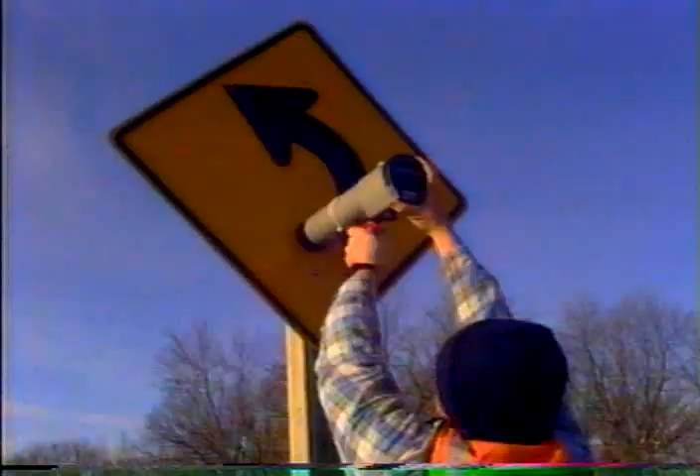I won't ask you to pronounce that again, but what is that? That is a device that will check the reflectivity of the sign and give us a meter reading as to how the quality of the sign might be. So after you've determined there's a problem, what's the procedure then? Any of the problems that we find on these inspections would be put on a complaint form.

So there must be quite a pile of those things. How do you handle that? Well, the emergencies we take care of as soon as possible. The other problems are put on a work order master list from the complaint forms, and we have a large list. And then I assign that to the traffic control foreman, who then prioritizes his work and schedules his work on a daily basis to go to his crew.

So by keeping good records of all the problems reported in inspections or employee observations or citizens' reports, then you prioritize the needed maintenance, schedule and assign the work, and then record what the job involved and when it was completed. So that must give you a pretty detailed history of about every sign in the county. Yes, it does, and recently we converted all this information to a computer database so we can access it much quicker and easier.

Well, Ken, I'll let you get back to work. Thank you very much for the information. Appreciate you coming in. Thank you very much. Thank you.

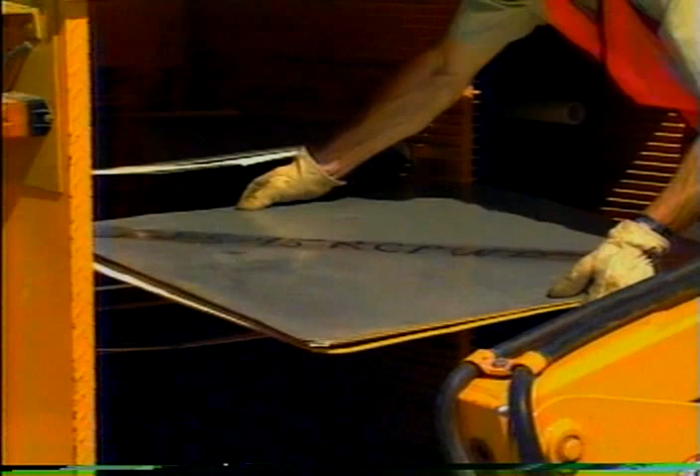The next step is out here. Before going out on the road, the repair trucks need to be equipped with the right signs and, of course, the right tools. All the key signs are kept on the truck, and they require special care. Whether stored vertically or horizontally, the sign face must be protected by placing some kind of packaging or protective wrapping between each and securing them so they don't rub against each other, keeping the packing material dry.

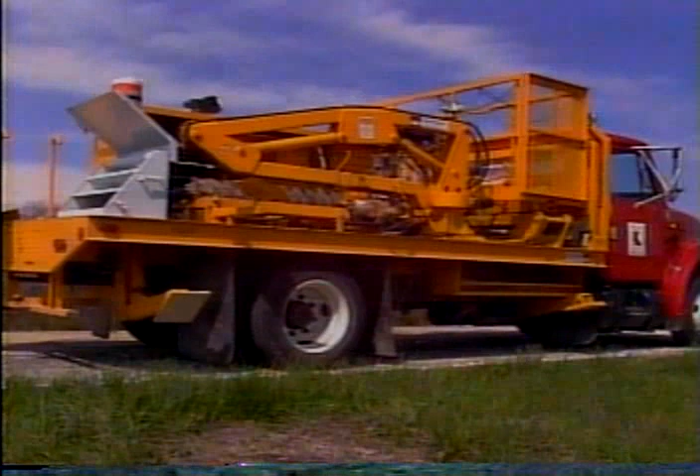A comprehensive list of common and necessary equipment and tools can be found in the pamphlet Maintenance of Small Traffic Signs. However, here are some not-so-common items found on Riley County trucks. Because of the flexible nature of Carsonite posts, it's recommended you attach only one blank. On occasion, Riley County wanted the sign to be visible from both directions, so they made this modification. A face was applied to both sides of one blank, and the Carsonite post was painted to match.

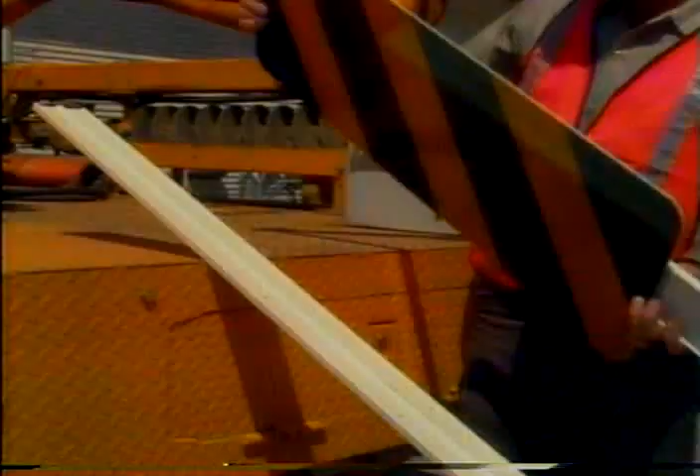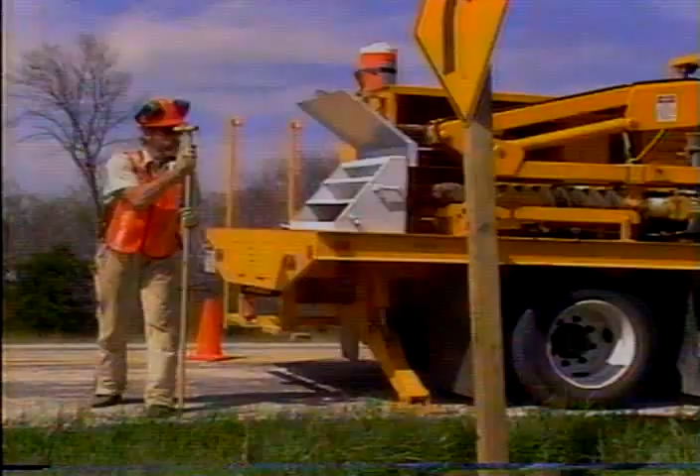The handle of this wrench was bent to facilitate the installation of tough nuts up next to the post. Tough nuts and Loctite are used with carriage bolts because they discourage vandalism. A looped cable was made so it tightens around a wood post as it's pulled. This device is exactly 5 feet high and used to check the height of the bottom of a sign from the edge of the traveled way during installation.

All Riley County sign trucks are equipped with a ball bank indicator to frequently check curves and turns, and a distance measuring instrument, which determines the longitudinal placement of signs. Every truck should have these items for the protection of the crew: hard hat, gloves, ear protection, back brace, orange safety vests, cones, warning barricades, and flashing beacon. They also carry the Manual on Uniform Traffic Control Devices and the Kansas Handbook for Low-Volume Rural Roads.

We're going to show you 4 typical but very important operations: minor maintenance, sign and post installation, using a ball bank indicator to determine the need for either a curve or turn sign, and if a speed advisory plate is required, and finally, object markers and delineators. For each of these operations, we'll stress conformance to the standards and guidelines in the Manual on Uniform Traffic Control Devices, the Handbook of Traffic Control Practices for Low-Volume Rural Roads, and the Maintenance of Small Traffic Signs.

Minor maintenance is our first example. Chuck noticed this sign en route to another location and has decided to repair it now. Even though Chuck will be stopped for only a few minutes, he follows the appropriate procedure for traffic control. He parks in the direction of traffic and as far off the road as possible with the truck's warning beacon flashing. He places an advance warning sign where it can be seen by approaching drivers and sets out cones to channel the traffic around the work area.

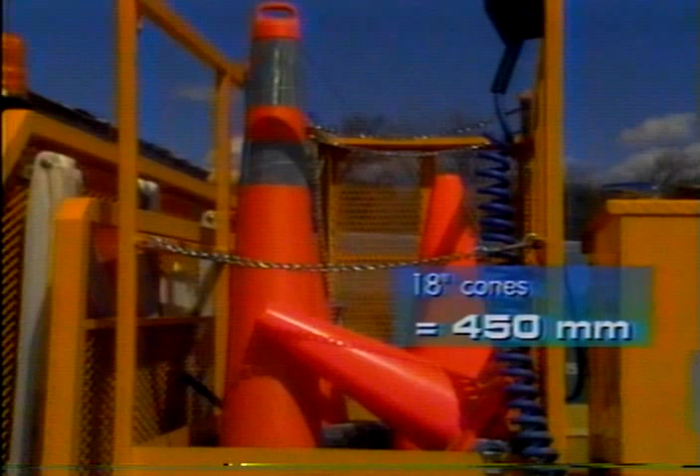On low-volume roads, that is less than 400 vehicles a day, with speed limits of 55 miles an hour or less, 18-inch cones are used. On roads with speed limits above 55 miles an hour, or when working at night, 28-inch or larger cones with reflective strips are used. Since speed limits, traffic count, sight distance, and location conditions influence the kind of safety work zone needed, work crews need to be familiar with the guidelines in Part 6 of the Manual on Uniform Traffic Control Devices. The rear bumper is a heavy-duty bumper with a non-skid surface to allow Chuck to safely stand on it.

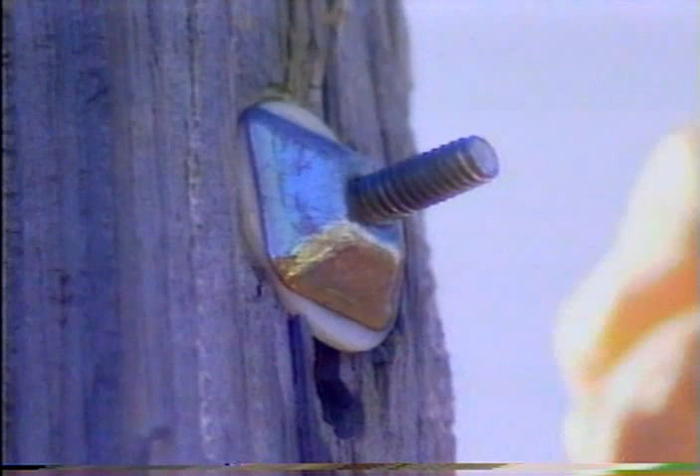After tightening the tough nut on the carriage bolt, Chuck applies Loctite, one brand of fluid that keeps the bolt from working off. While the manufacturer recommends applying the fluid to both the bolt and nut, be aware that it will make removing the tough nut almost impossible. The job isn't finished until the work has been recorded. This is very important, not only to keep the inventory and work schedules current, but also to help protect the agency in any tort liability cases. Replacing a sign and post is our second field operation.

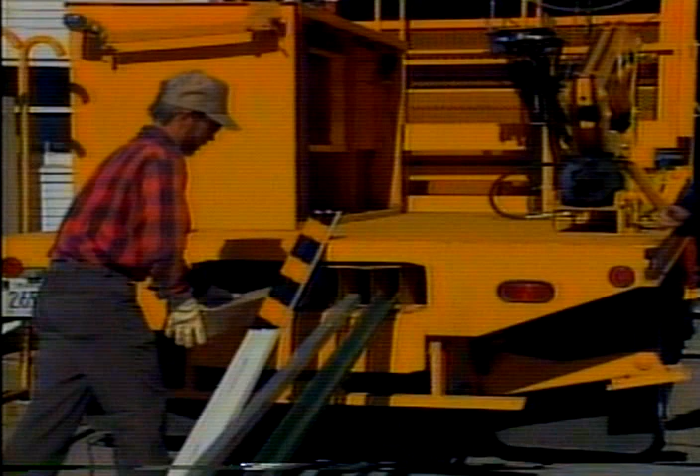There are several types and sizes of posts. Which one is right for the job? Two things must be considered. First, safety. For successful, safe performance, a post must bend and lay down or fracture when hit without causing excessive damage to vehicles. Base-bending metal signposts have been used for many years to provide effective economical support for signs.

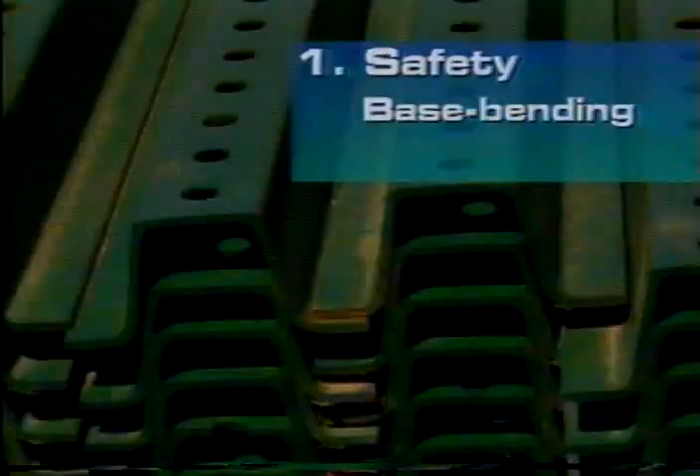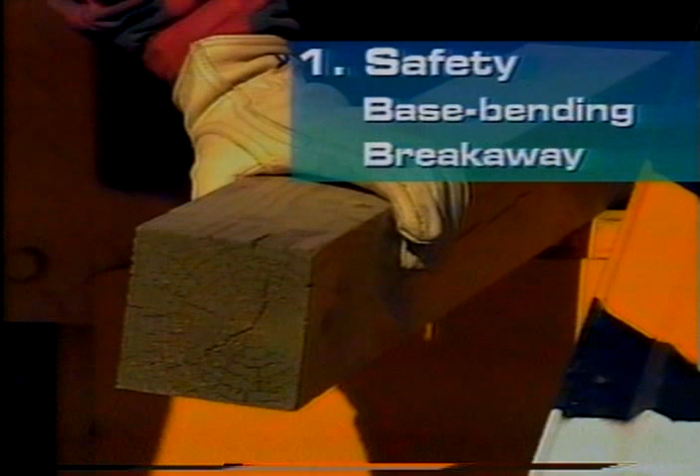A base-bending metal post has no built-in breakaway or weakened design. Steel U-posts, standard steel and aluminum pipe posts, square steel tube posts, and X-posts are all base-bending metal signposts. Wooden posts up to 4x4, on the other hand, are considered breakaway posts. Larger wooden posts must be drilled to assure they'll break away when hit. Secondly, whether metal or wooden, all posts must be sized properly based on the type of sign they will support.

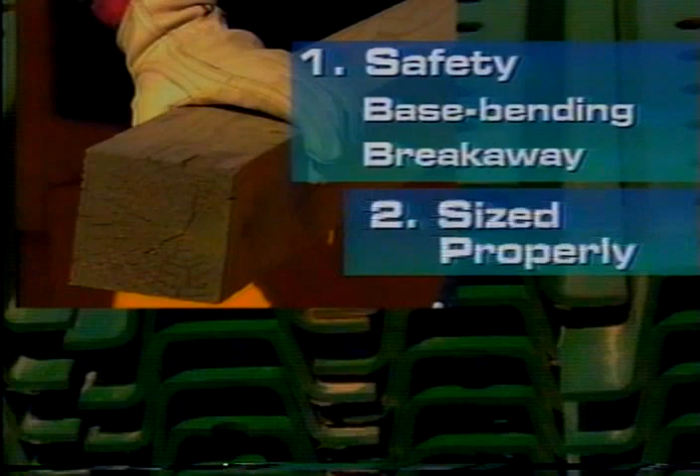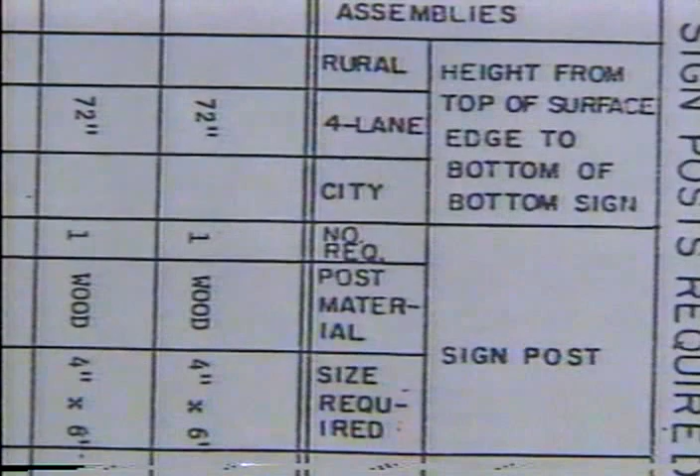Here's an example of a table provided by the Kansas Department of Transportation. The appropriate post for each size of sign and the minimum length of post in the ground can be determined. Suppliers also provide similar tables. The guidelines in the Manual on Uniform Traffic Control Devices are based on a typical situation. It states that normally, signs should not be closer than 6 feet from the edge of the shoulder, or if no shoulder, 12 feet from the edge of the traveled way.

In many local roads and streets, particularly in rural areas, these distances would be unrealistic or impractical. And on rural low-volume roads with no shoulders and narrow right-of-way, 6 to 12 feet would put the signs in weeds and bushes. So the following guidelines should be followed. All signs should be at least 2 feet outside the shoulder, or if none, 2 feet outside the traveled way to avoid being struck by large vehicles.

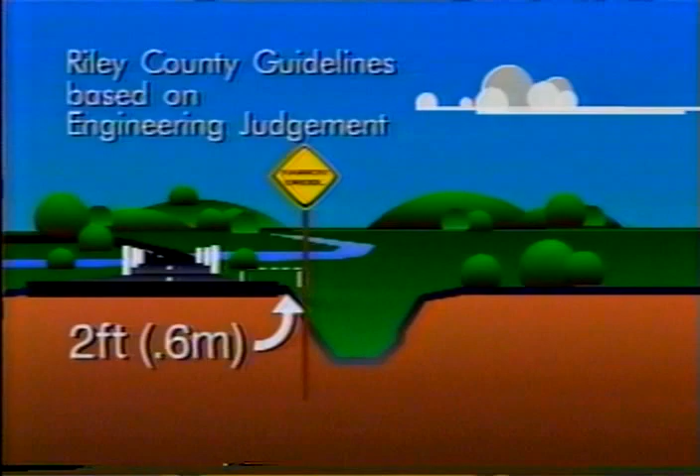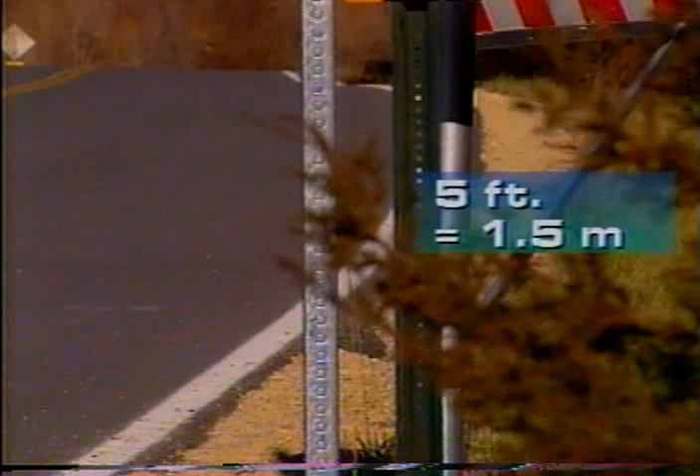Signs erected at the side of the road in rural districts are to be mounted at a height of at least 5 feet, measured from the bottom of the sign to the near edge of the traveled way. In business, commercial, or residential districts, this height is 7 feet. The height to the bottom of a secondary sign may be 1 foot less than the normal height.

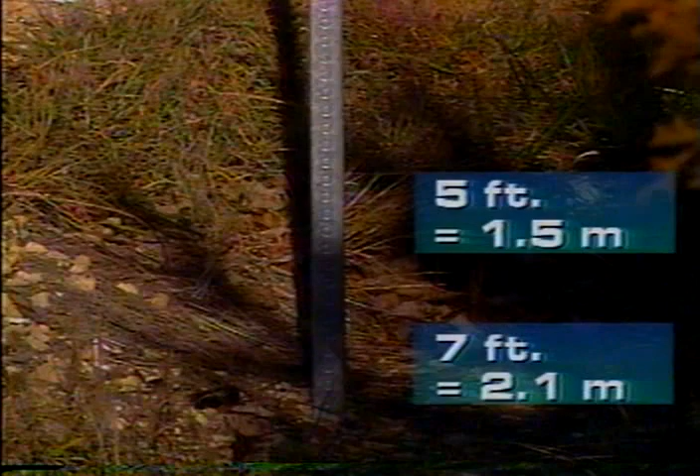A routine inspection found this warning sign leaning over. The ditch was partially caved in, so the new post will need to be driven in a different place. Before any new hole is dug, even if only a few inches from the previous one, you must check with all utility companies. Severing a buried cable could be dangerous and costly. So the sign supervisor called DigSafe, a utilities clearinghouse here in Kansas, before assigning the job to Doug.

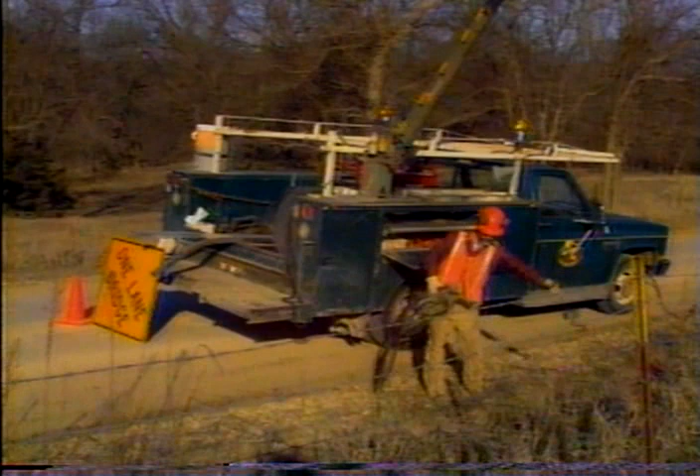After detaching the sign, Doug removes the old post with a hydraulic post puller. The post driver is attached to the crane and elevated so the post can be inserted in the driver. It's good procedure to clean the quick couplers of the hydraulic hoses before connecting.

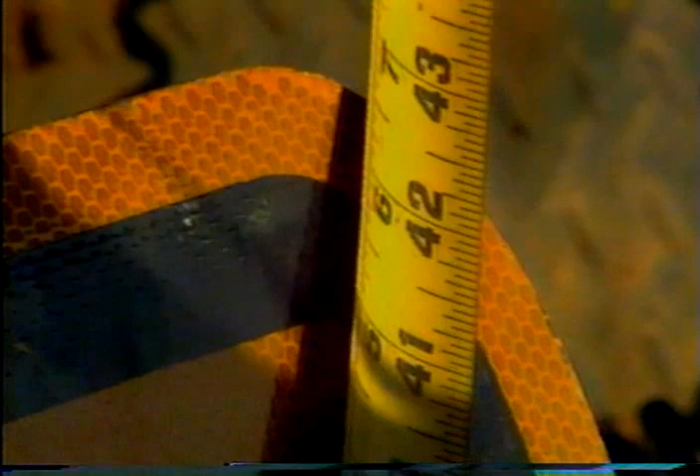Before driving the new post, Doug measures first the sign, then the post, marking where the bottom of the sign will be. This mark is his guide for driving the post to the proper depth. The new hole will be about a foot from the old one and is within the proper guidelines for distance from the edge of the traveled way.

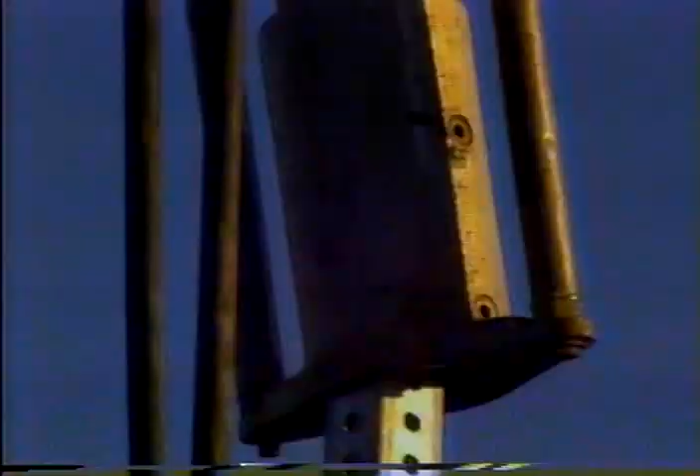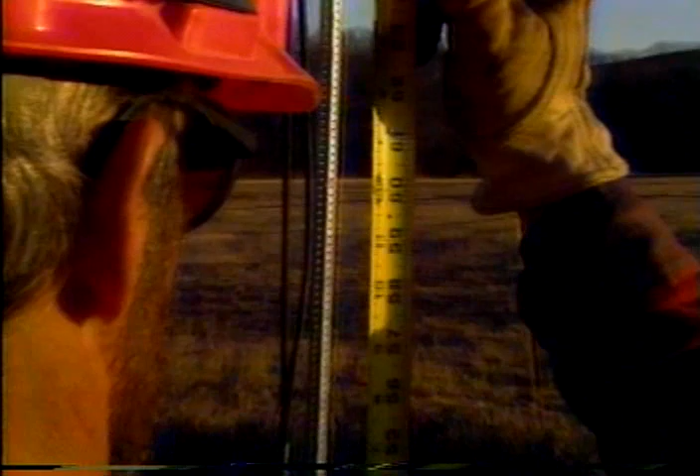While driving the post, Doug keeps track of the depth and uses a level to make sure the post is straight. When the post is at the right depth, the height of the mark is checked from the edge of the road. It is at the proper level, 5 feet. The sign is then bolted to the post using carriage bolts, tough nuts, and Loctite. And again, the work is not finished until it's recorded.

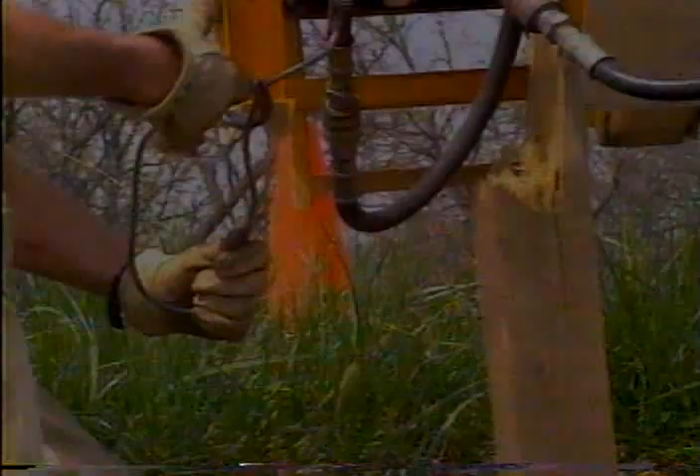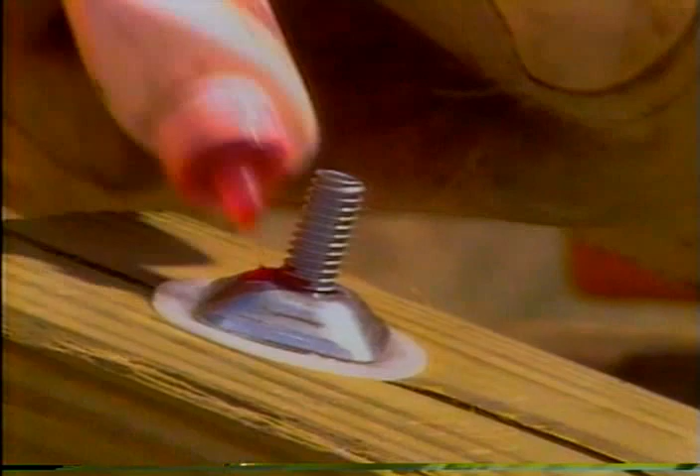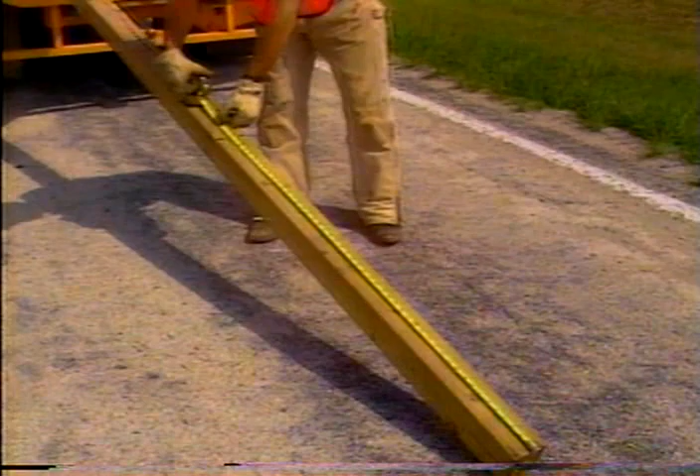Here's the procedure for replacing a wooden post. The modified cable is used to pull the broken wooden stub. The sign is bolted to the post. A mark is placed 5 feet from the bottom of the sign. The remaining length of the post from that mark to the bottom of the post is measured. This is how deep the hole must be dug if the shoulder is level with the road.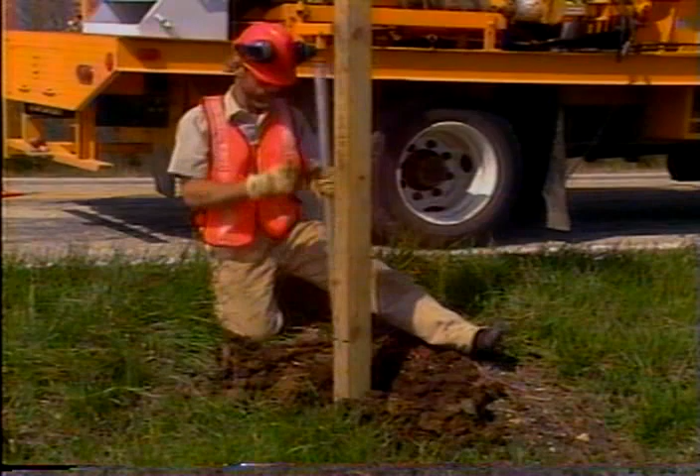If the shoulder slopes downward, a longer post may be needed to make sure the minimum length is in the ground. Before filling the hole, the height of the bottom of the sign from the edge of the traveled way is rechecked. It's very important that the soil be tamped for stability as the hole is filled, and that the vertical level is checked.

When a sign needs to be placed where there is solid rock, a jackhammer can be used. Or when there is no solid base, such as this area, concrete may be used.

Curves in the road. When do they need a warning? And is it a turn or a curve? And what about a safe speed advisory? How you determine the answers to these questions is our next subject.

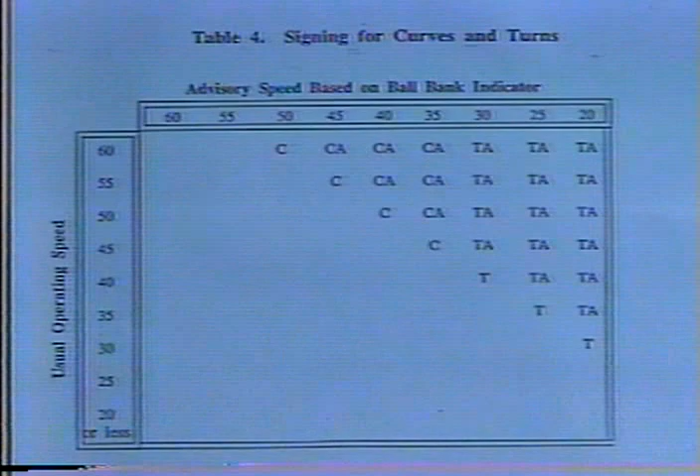The Kansas Handbook of Traffic Control Practices for Low-Volume Rural Roads recommends the use of an advisory speed plate when the advisory safe speed of the curve is more than 10 miles an hour lower than the approach speed limit or the prevailing approach speed. This handbook also has a table to help determine when a curve or turn sign is needed and if an advisory speed plate is necessary.

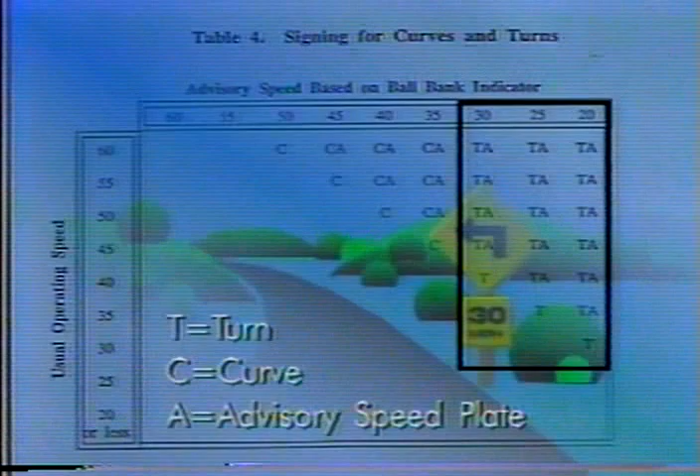When the advisory safe speed of a curve is 30 miles an hour or less, a turn sign is used. When the advisory safe speed of a curve is greater than 30 miles an hour, then a curve sign is used. The key is knowing what the advisory safe speed is for each curve. The accepted practice is to use a ball bank indicator to determine what that safe speed is. When installed in a perfectly level vehicle, the indicator should read 0.

Maintaining a smooth and steady speed, several runs are made through the curve. The first run should be made at a speed somewhat below the anticipated maximum safe speed, the subsequent runs at 5-mile-an-hour increments. If a ball bank reading of 14 degrees or greater occurs at 20 miles an hour or less, the advisory safe speed is below 20 miles an hour, which means a turn sign is needed.

If a ball bank reading of 12 degrees occurs at the trial speed run of 20 miles an hour, 25 miles an hour, or 30 miles an hour, then the speed at which it occurs is the advisory safe speed and a turn sign is needed. A ball bank reading of 10 degrees at trial run speeds of 35 miles an hour or greater indicates that the safe advisory speed of the curve is 35 miles an hour or greater, so a curve sign is needed.

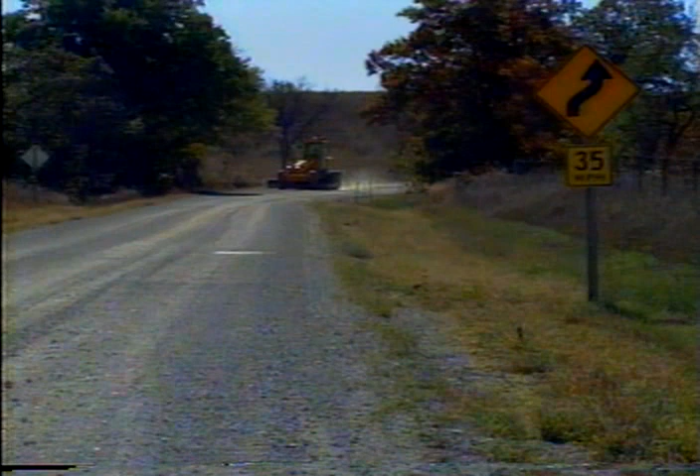The advisory safe speed is then compared to the established or prevailing speed limit. In this case, the speed limit is 55 miles an hour, which is more than 10 miles above the advisory safe speed of 35 miles an hour, so an advisory speed plate is required.

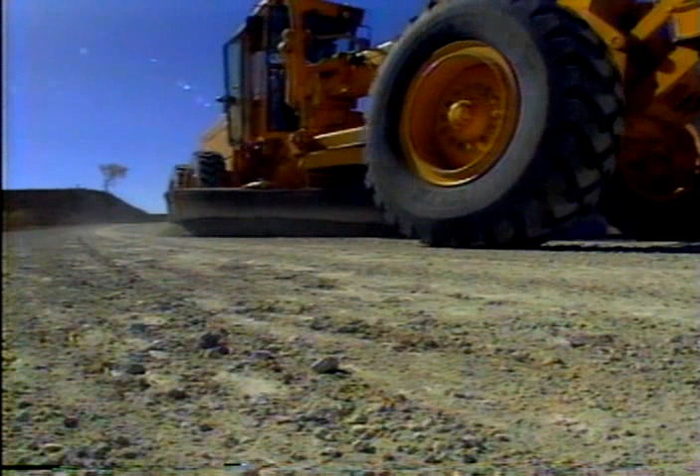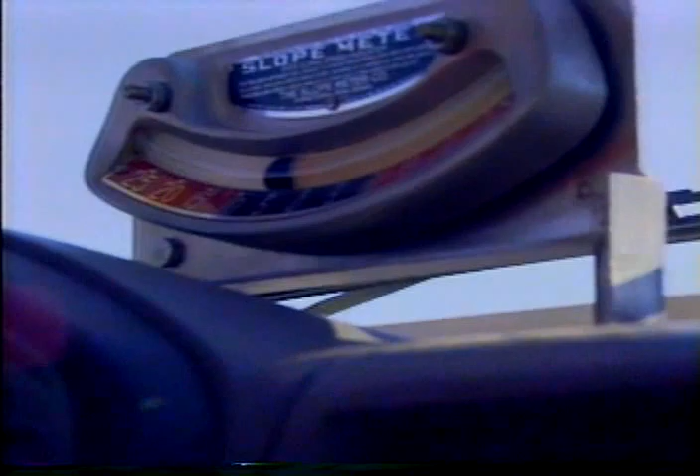Curves, especially on unpaved roads, frequently have their cross sections changed, and that can change the ball bank reading. Every time your grader operator grades a curve, the ball bank reading could change. Because many factors affect the surface of the road, ball banking curves is an ongoing process. All Riley County sign trucks have ball bank indicators mounted permanently on the dashboard, so they can frequently ball bank the curves.

Our last field operation involves object markers and delineators. Object markers are used to mark obstructions in or adjacent to the roadway. There are three main types. Type 1, Type 2, Type 3. Type 1 and Type 3 are used for obstructions within the roadway. Type 2 and Type 3 are used to mark obstructions adjacent to the roadway.

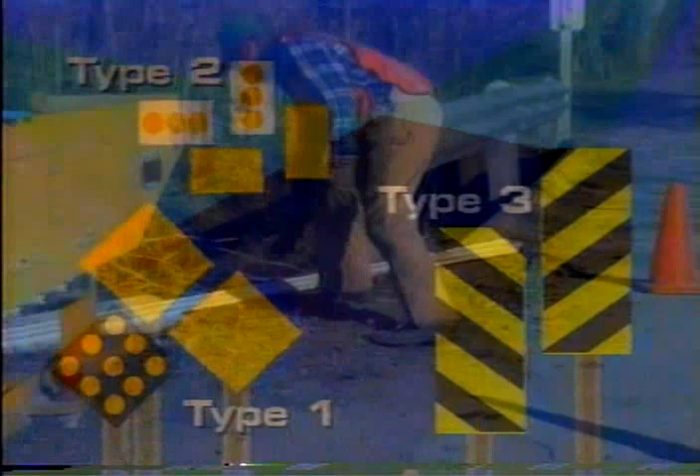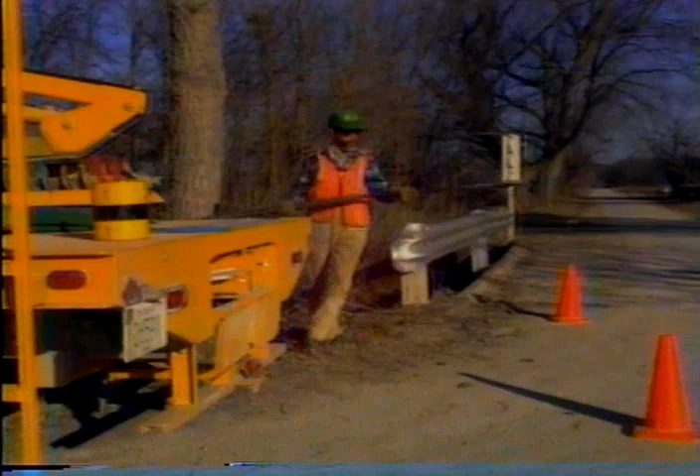Here, a Type 3 object marker near a bridge abutment needs replacing. For this type of post, a special pilot driver is used to make the hole. A flexible carsonite post is used because it can withstand being hit occasionally by farm equipment. The new post is marked where the bottom of the sign will be. It also requires a special post driver.

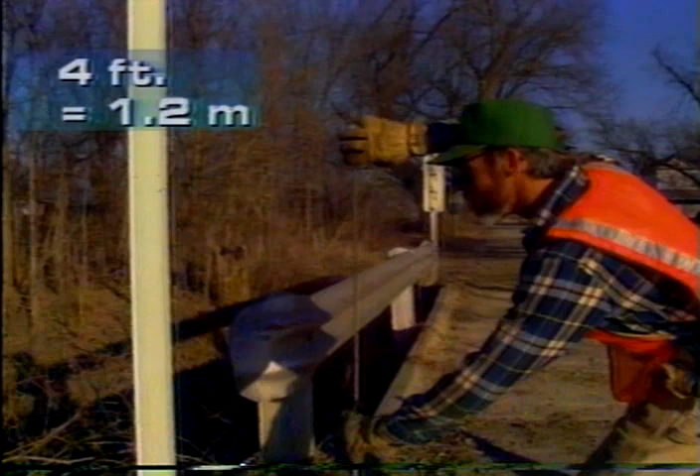As you can see, this is a very flexible type of post. Use caution when removing the driver. The post is driven to the appropriate depth for the bottom of the sign to be 4 feet above the surface of the road. The Type 3 object marker is attached with rivets, and spacers are placed between the sign and post. And of course, the work is always recorded.

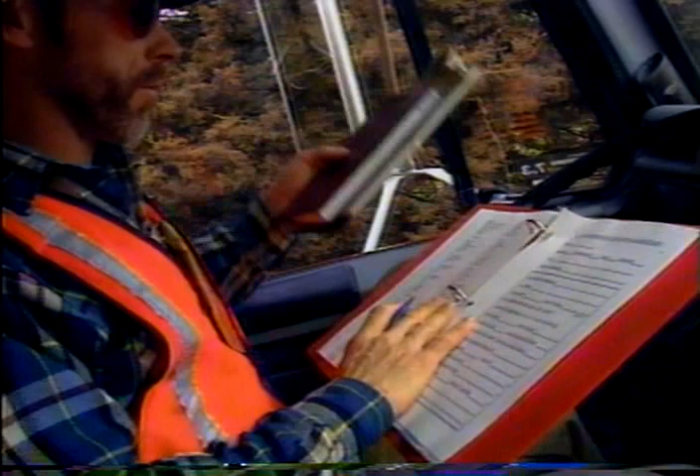Delineators indicate the horizontal road alignment. On gravel roads, they are the only indicators.

We've shown you a system of tracking and recording problems, the signs and equipment necessary for proper maintenance. We've demonstrated some typical maintenance operations following the guidelines in the Manual on Uniform Traffic Control Devices. And we've also used the Kansas Handbook on Traffic Control Practices for Low-Volume Roads. Most states have similar manuals to this. But what makes it really happen? We asked the Riley County Director of Public Works.

If you operate a proper signing program, where you're into signage maintenance, where you're concerned about the proper sign, the proper placement of the sign, and then once it's been placed, the proper maintenance of that sign, that is an expensive undertaking. However, if you choose not to do those things, the alternative is even more expensive. Then we also invest fairly heavily in our personnel; everybody from the people that are doing the design to the people that are actually physically placing the sign in the field goes through some fairly extensive training.

So it ultimately boils down to people like you doing this job right and doing it right the first time and doing it every day. Promoting safe driving. That's what sign maintenance is all about.